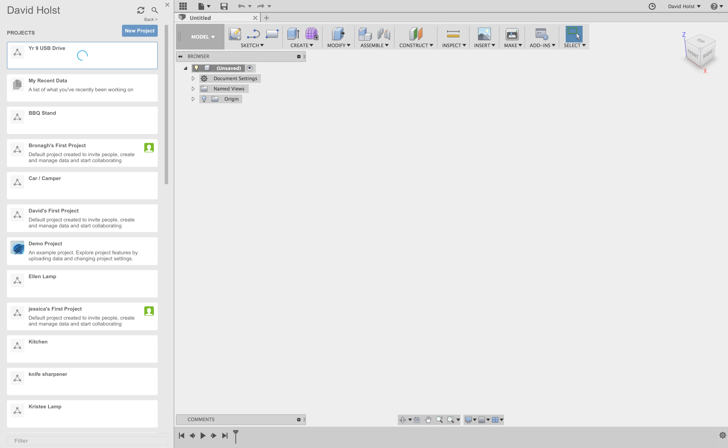Wait for that to save, go into it, and then click Save over here. Location, check that I'm in Yr 9 USB Drive. I'm going to call this USB Tute and hit save. That's going to make sure it continually auto-saves, so it's pretty much impossible for you to ever lose any data.

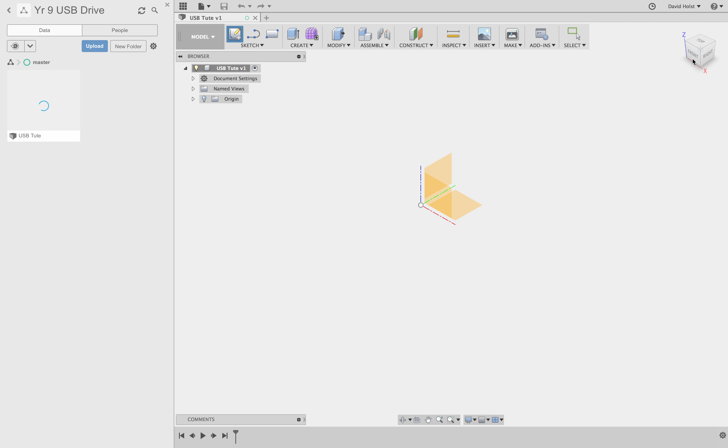Okay, so we're going to start our actual work. We're going to click on Create Sketch here, and looking at our cube over here, we know that diamond is the top, so we know that this guy here... hold up, didn't quite work.

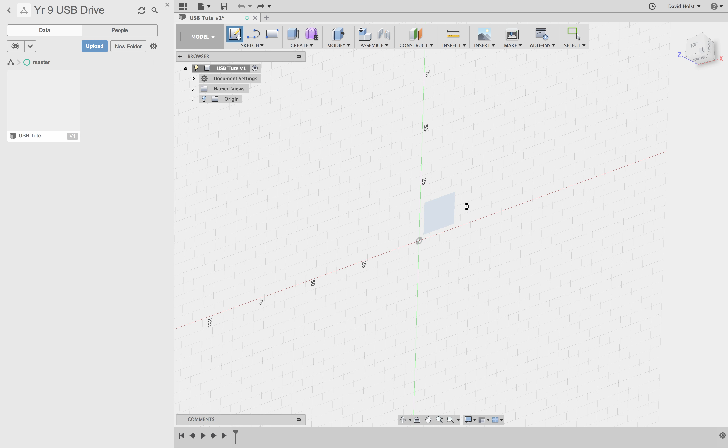Create sketch - I'm going to make sure I jump on this diamond here. This bottom one is the diamond that lines up with the top, because it's the same shape as the cube. So I'll click on that. You'll know you're on the right one because the cube in the top right hand corner will read 'top' for you.

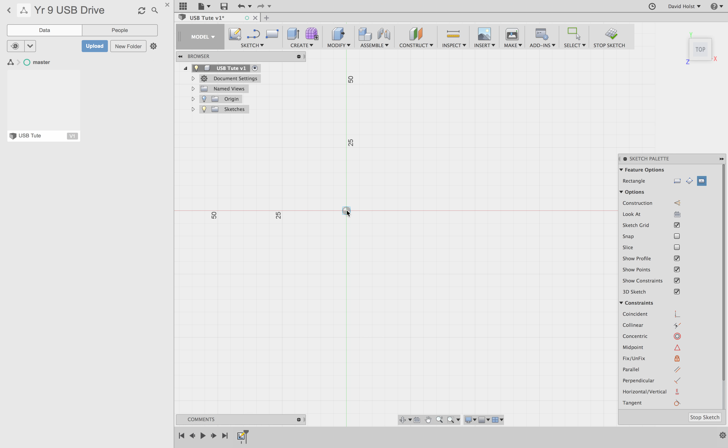The first thing I'm going to draw is a box that shows me how big my USB can be. I'm going to hit S, type in rec for rectangle, and do a center rectangle. Then I'll click in the very middle origin and drag it out. Your maximum size is 75, so I'm going to type in 75, tab, 35, like so.

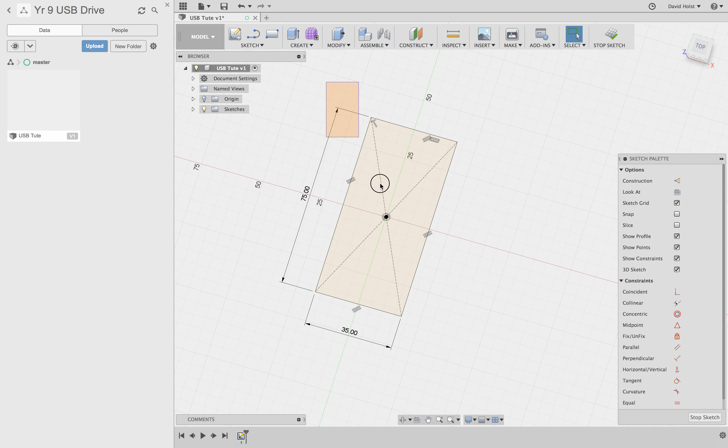That's our maximum size. Now I don't actually want to use that box - I just want it to be a construction box. So the first thing I'm going to do is draw a box around all of it, hit X, and that's created a guideline box to help work out what I'm going to do.

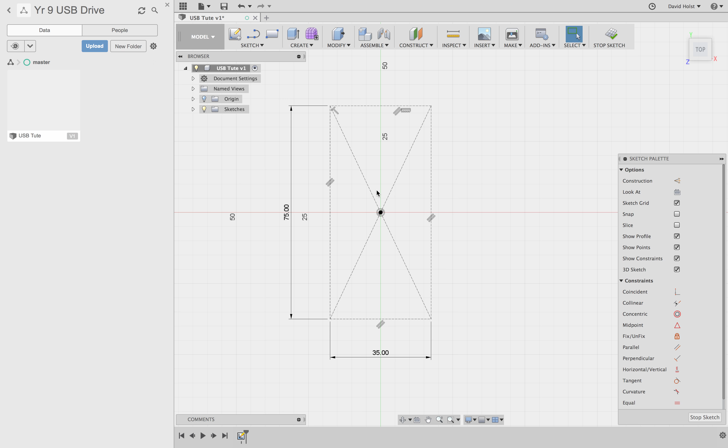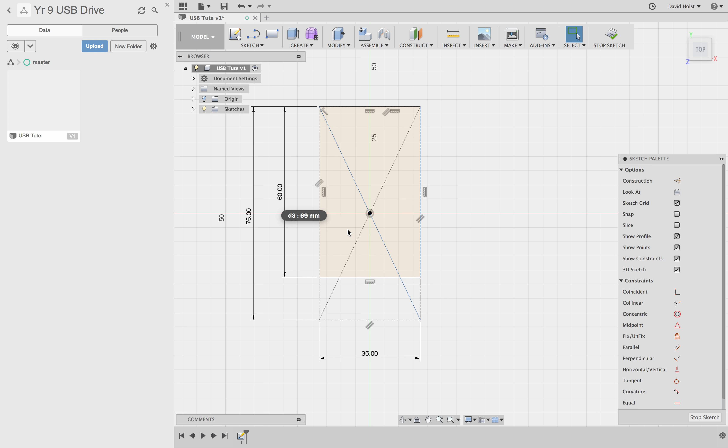For this one here, I think I might actually make mine roughly about this size - I quite like the proportions of what's going on there. So I'm going to come down to here, make it a little bit shorter. I'll go 35 by about 60, I reckon. Change that one to 60. So I've got a 35 by 60 there. Alright, I'm happy with that.

If these construction lines are upsetting you or annoying you, remember you can just delete them out at any time. But it's just to make sure you don't make it too big. And I'm going to hit D - I'm actually going to dimension this line out here as well.

Now I'm going to put a bit of a curve in the sides of this. The first thing I'm going to do is use my line tool to create a line across the back here, and then create a line down the front here.

Now they're going to be construction lines, so I'll click on them, hit X, click on the other one, hit X, and now I'm going to dimension it to make sure it's the correct distance in the back. I'll hit D, click on the back line, then the dotted line, and make that 8 mil, I think. Click on the front line, click on the dotted line, and make that one 8 as well.

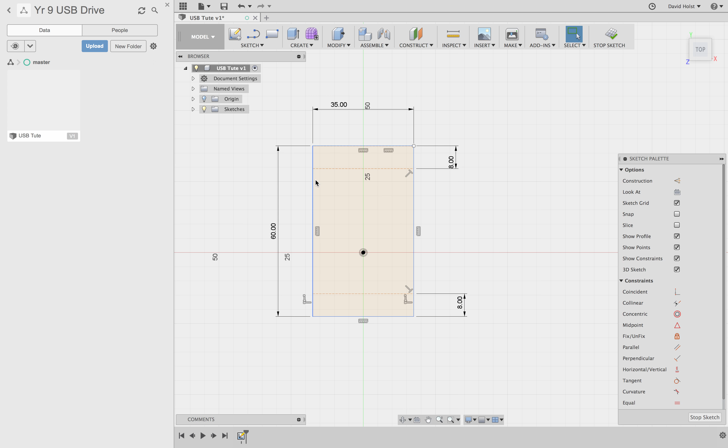Now I'm going to bend it in and put some sort of arc here. I'll hit S, type arc, and want a 3-point arc. I'll click there, click here, and bend it in just a little bit to make it easier to hold - so I'll go to about there maybe.

Now if I want that same line over here, I can use a little trick called mirror. First I'll hit L and draw in a center line. When I hover it over that, the little triangle comes up - see the triangle coming up again? That means I've got a center line down the middle. I'll click on that center line, hit X, and use the mirror command.

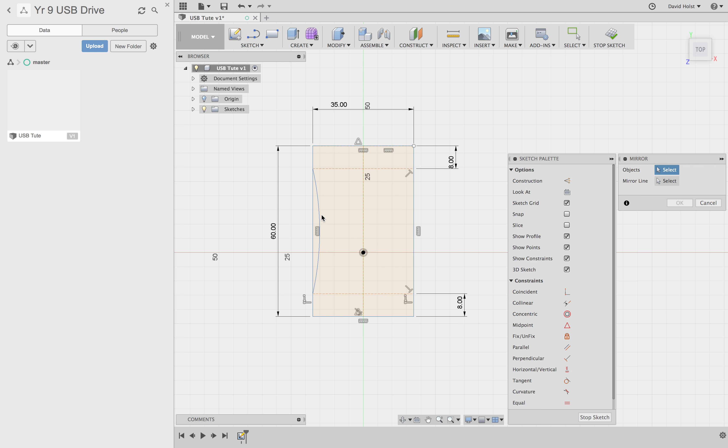So I'll hit S, type in mirror, click on that line, go mirror line, select that middle line... let's try that again - S, mirror, objects, this line, mirror line, that line. You can see it's just popped it up around that corner there, hit OK, and now I need to trim out these side lines here that I've got. I'll hit T, trim that one out, and then trim that one out there. So I'm starting to get a bit of a shape for what it is that I want there.

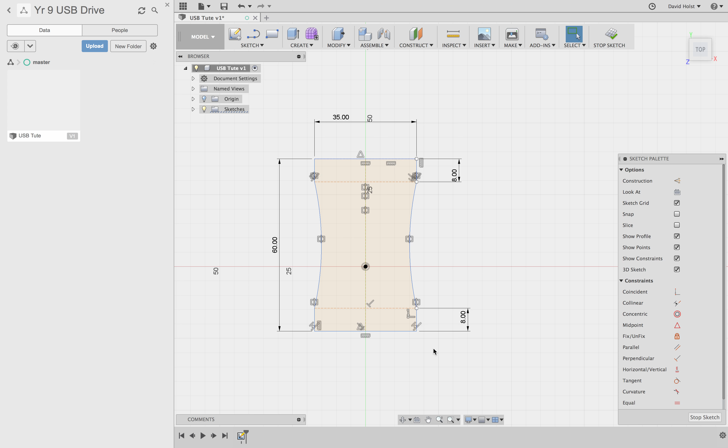So now what I need to do is add some thickness to that. I think 10 millimeters is your maximum thickness, so I'm going to make this about 8 millimeters - I think that's going to look proportionally correct. I'm going to hit E to extrude, click on this shape, and go 8.

Now if you want to see what that actually looks like, you can go to the top here and click on this top left-hand section of the cube, and you can see sort of what that thickness is going to look like.

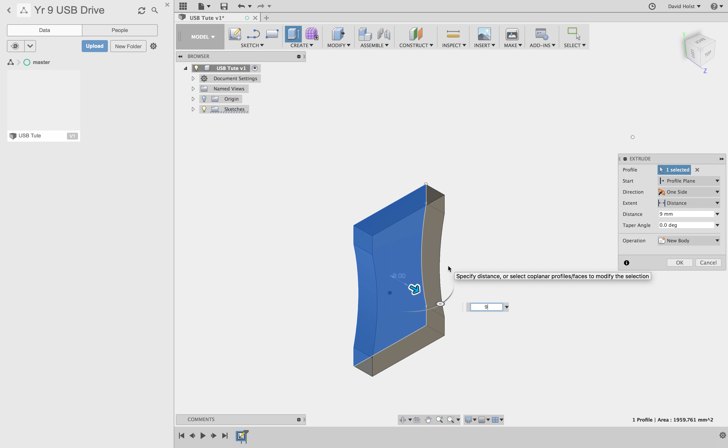I think it could be a little bit thicker, I'm going to go to 9 mil. Yeah, I think that looks good there. Alright, so we'll roll it round, jump on this top corner, and I'm starting to get something that looks a little bit like what I'm after.

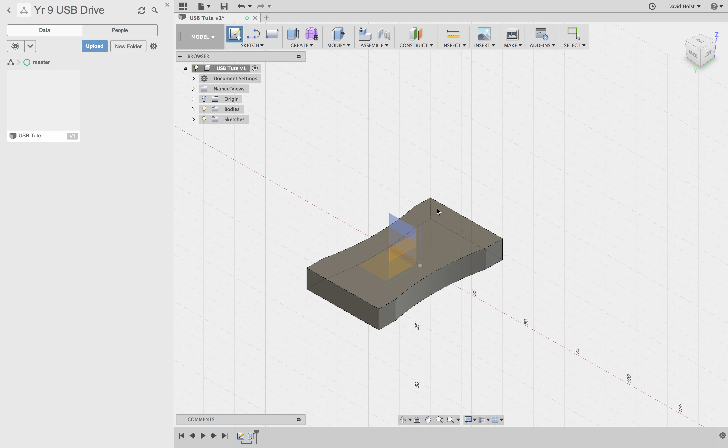So I'm going to put some indents in this top section here, make a bit of a pattern on there. I'm going to click Create Sketch and jump back on this top plane.

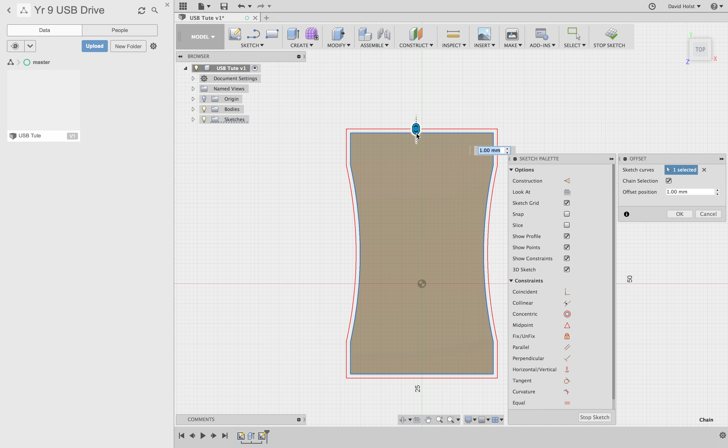I'm going to put in a line going across. Let's do an offset - I'll hit O for offset, click on this line. No, I'll do it as a line, I think. Sorry, go back, I'm going to hit L for line. I'm going to snap it to the middle of there, and the middle of there.

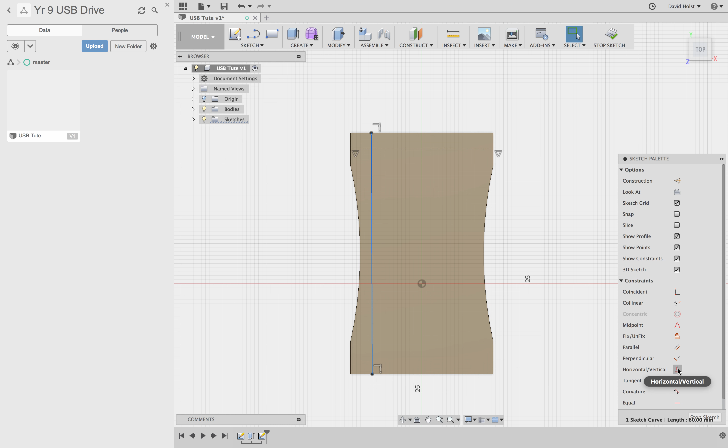Turn it into construction, and then I'm going to do another one down here, like that. I don't think that line's dead straight, so what I'm going to do is click on that line and hit horizontal vertical down here in my sketch palette - that's going to lock it.

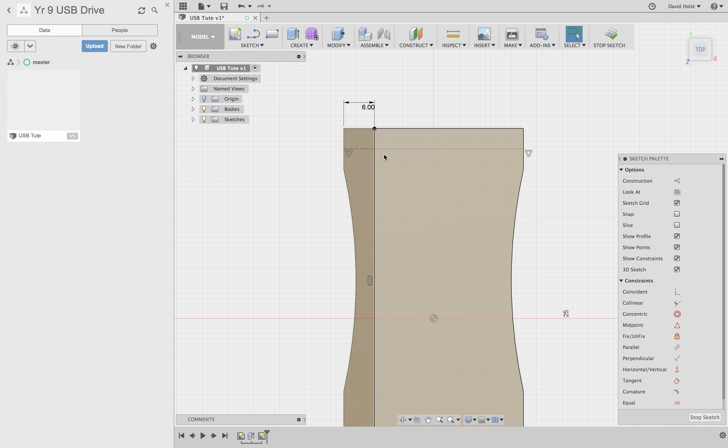I'm going to make that one so it's about 4 mil in from the edge. Actually, I might make that about 6, I think - yeah, so then I won't interfere there. I'm going to do a 4.5 circle on there, like so.

Then I'm going to hit E and extrude that circle down. I'm going to go -1, like that.

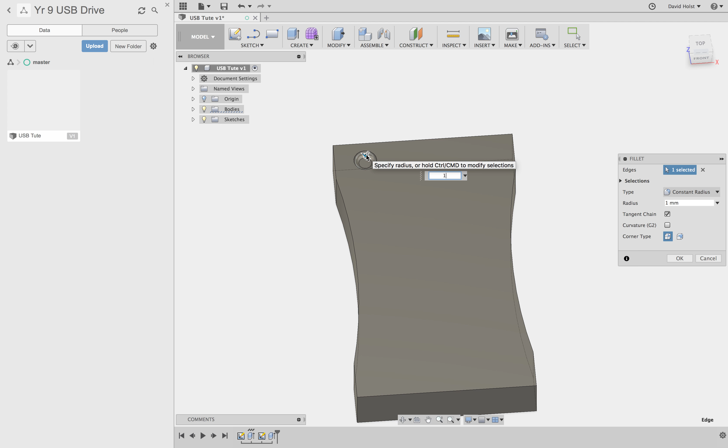I'm going to hit F for fillet. I'm going to fillet this bottom corner, and I'm going to hit 1 there, and round that out so it's kind of like a golf ball. And I'm going to hit F again on that top one, and do a 0.5.

Now what I'm going to do is go back into sketches. I'm going to turn this sketch 2 back on, so I've got these lines, and now I'm going to use a pattern to actually fill that pattern onto all of my object.

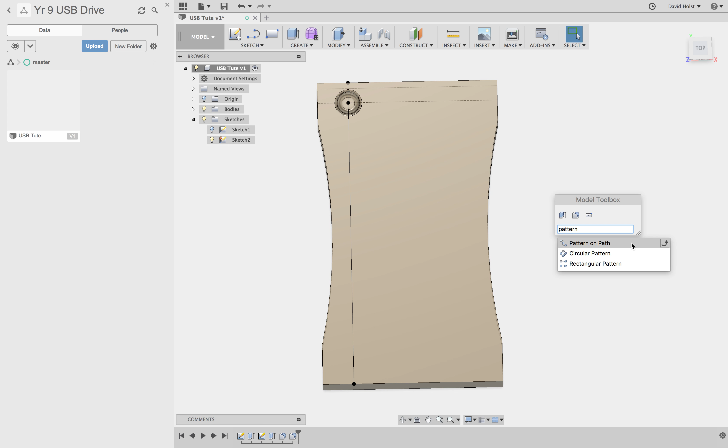So I'm going to hit S, type in pattern, rectangular pattern. Pattern type, I'm going to go features. I'm going to click this one, hold shift, this one, and this one. And my direction type, I'm going to go 10 mil on that.

Distance type, extents - let's go spacing. Change that one to 10. Direction select - so first thing I'm going to do is hit direction, I'm going to click on this one here.

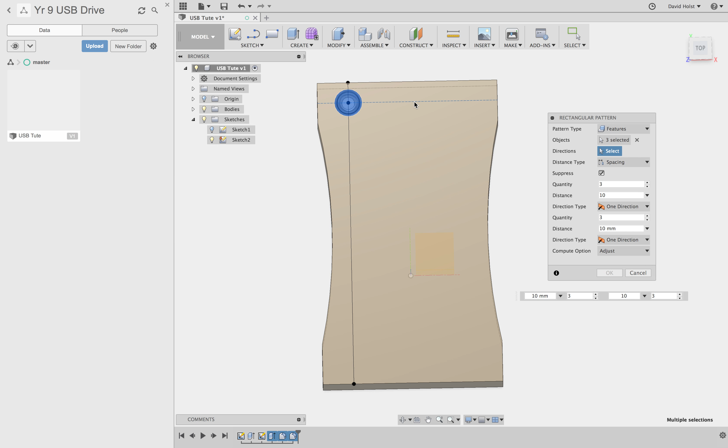I'm going to drag this out, so maybe 4. 4 and 7.5. 7.7 - yeah, so I'm going to go 4 and 7.7.

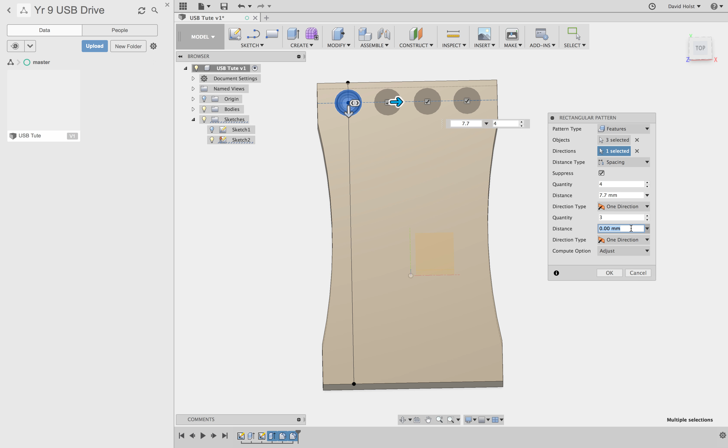And then on my other direction, I'm going to come down this line here, going this way, start with about 20. Got to click this arrow, pull that into about there. Quantity, I'm going to go about 8.

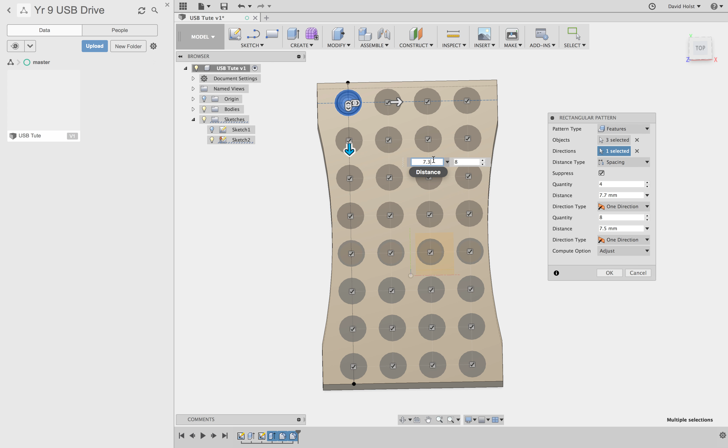I think is right, and I'm going to try and just space those out a little bit more. Let's go 7.5 - whoop. 8 on here, distance 7.5. 7.3 - yeah, I think that's about right. Enter. Let it do its thing, and I've actually applied that pattern to the top.

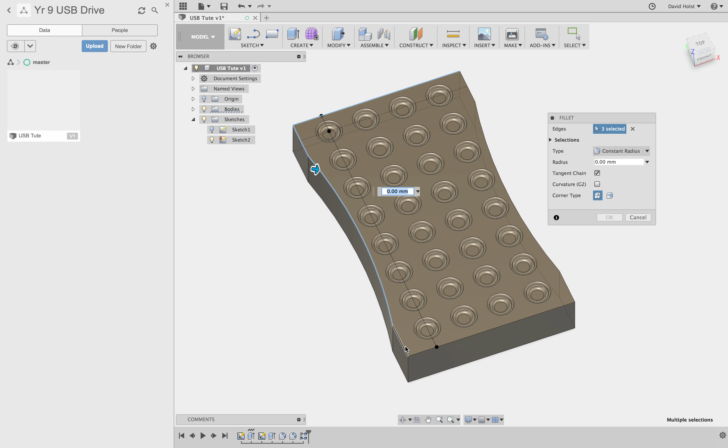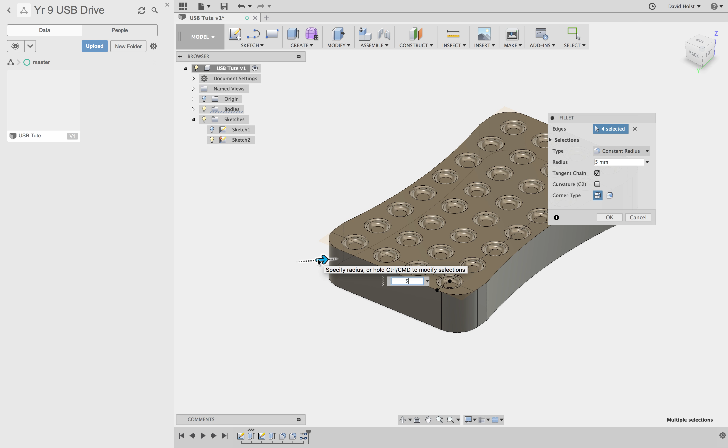Finally, I'm going to round my edges off, so I'm going to hit F for fillet and grab all these top edges. Actually no, the first thing I'm going to do is these edges around these edges here on the sides. I'm going to hit F, that edge, shift middle mouse button to go around, that one, and that one. I'm going to put maybe 4 mil on it - 5 mil, yep, to round that off, and then I'm going to fillet again.

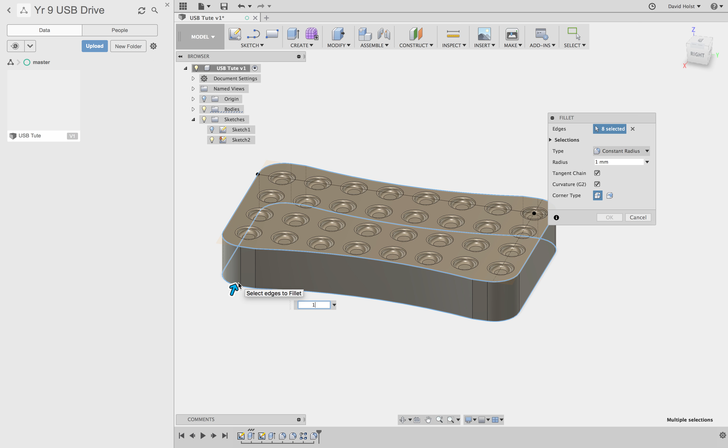Click all those, and we got the ones underneath as well - just clicking to highlight them all. Gonna make those maybe 1 mil - 0.5 - 0.8 - yeah it's not gonna let me do a 0.9 - I'm gonna go 0.8 on those, just because it's starting to interfere with other parts, so it won't let you actually do it.

Setback. Yeah. Yeah, so we'll just do a 0.8. Hit OK.

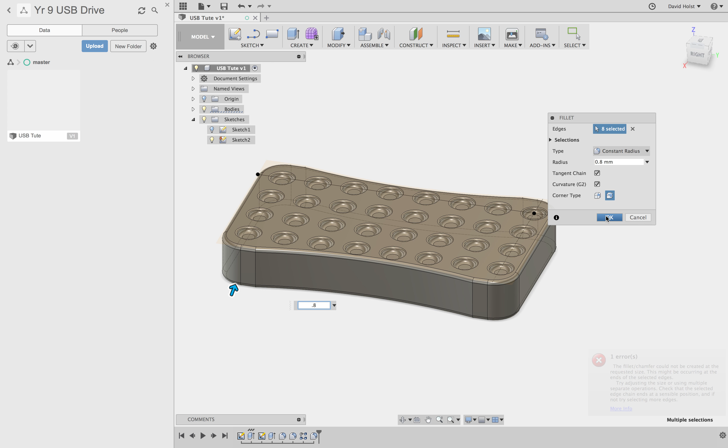Turn our sketches off, and we're starting to get a good looking shape for a USB.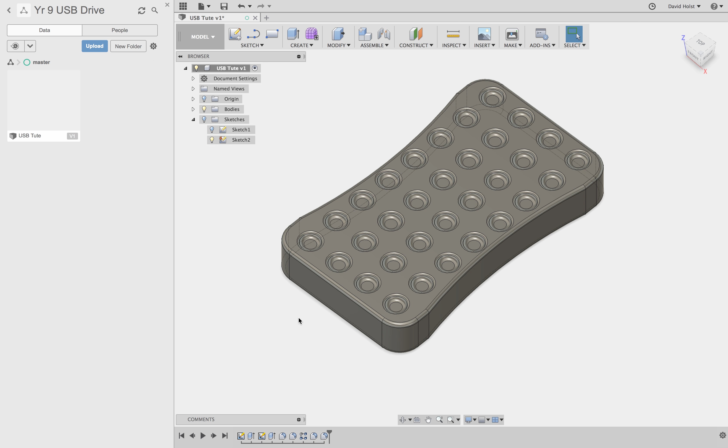Now hopefully that gives you the idea of how to make a basic USB drive, how to use some of the different tools inside Fusion, and it will help you decide which concept it is that you want to pick, so that you don't pick a concept that's too difficult to make. All right, thank you very much.